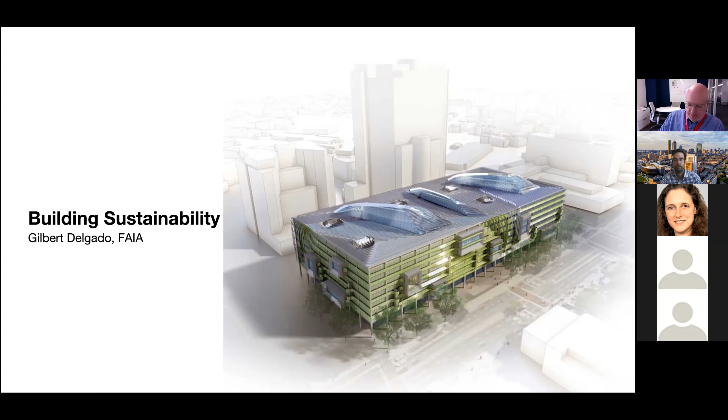A lot of this stuff is probably well understood by many, but let's look at it through the lens of what it means to the building environment.

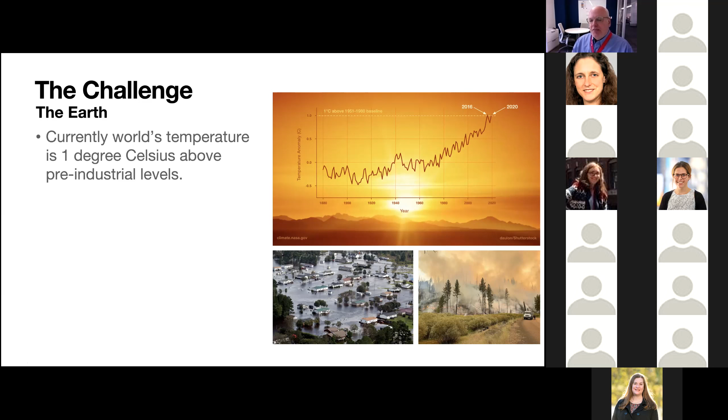Currently, the world's average temperature is about 1 degree higher than it was in pre-industrial levels, or roughly around the 1960s, which was the last baseline of zero. As you can see, it's been going incrementally up and down with the seasons, and then it finally reached about 1 degree back in 2016. So we're currently at that threshold.

At 2 degrees, if this were to continue and the temperature change increased 2 degrees above that baseline, we understand that coral reefs will start to disappear, and the Mediterranean will experience widespread desertification. So all the things we've come to love about the Mediterranean, much of it will be gone, and that is a serious concern to everyone on the planet. Then at 3 degrees, it's been said that 760 million people will be displaced due to sea level rise, and primarily some of the major metropolitan areas on coastlines are all at threat.

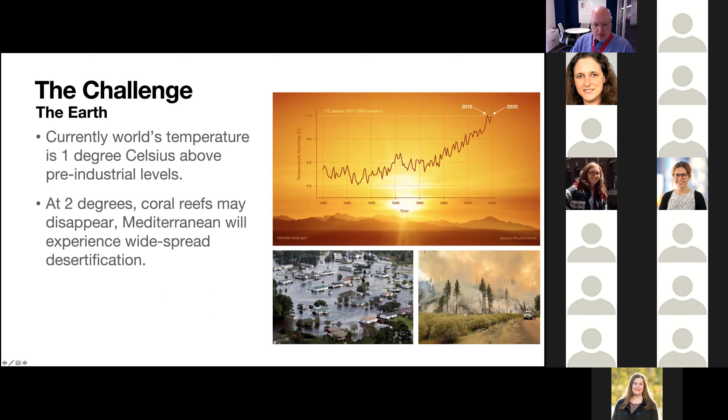So the challenge is an imminent threat in many ways. To maintain a 1.5 degrees Celsius rise, we can only emit 340 gigatons of CO2 to the atmosphere. We've quantified that volume, and therefore, to reach that target, we now have a definable goal, which is a 65% reduction by 2030.

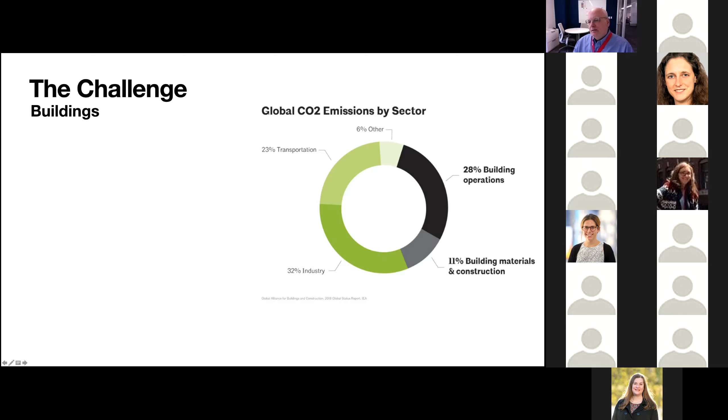Now this is where our responsibility comes into play. If you look at CO2 emissions on the planet by different enterprises, the building enterprise takes up roughly about 40%. About 28% of it is based on building operations — that's the carbon generated by people turning on the lights, heating and cooling their buildings, and operating their machinery. Another 11% is based on embodied energy in the buildings themselves, in terms of the energy required to actually build the building. Together they comprise about 40%; transportation is about 23%.

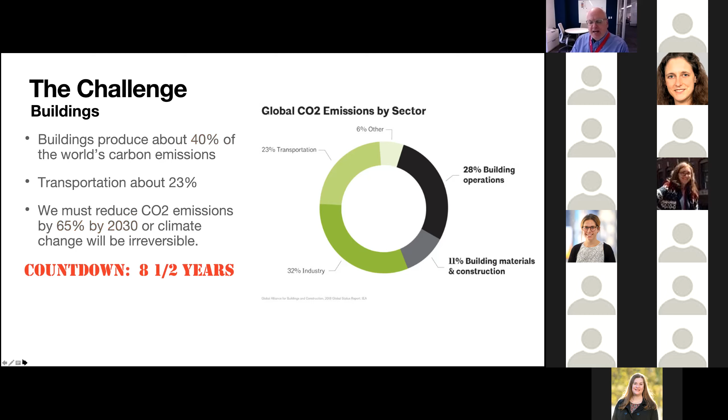And just to reiterate, we must reduce CO2 emissions by 65% by 2030, or the climate change will be irreversible. That leaves us 8.5 years to meet that target.

The other sobering reality is that the building stock of the planet will double in about 40 years. So we need to reduce our carbon greenhouse gas emissions by 65%, and at the same time, we're going to be increasing our building stock. In some ways, we see some of that on our very own campus. Even though we are challenged to reduce our carbon emissions, we are also increasing the size of the campus significantly, and this is mirrored on a global scale.

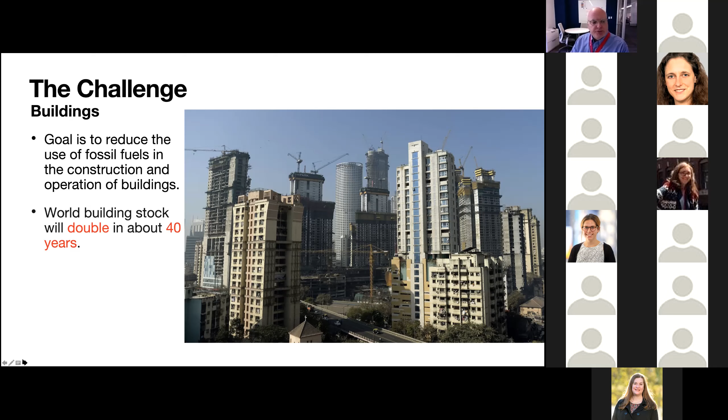Looking at how buildings more specifically use carbon, about 10 to 20% is the embodied carbon in the building, and 80 to 90% is the operation - specifically heating and cooling, lighting, electrical equipment and appliances - with the embodied energy being the blue pie slice.

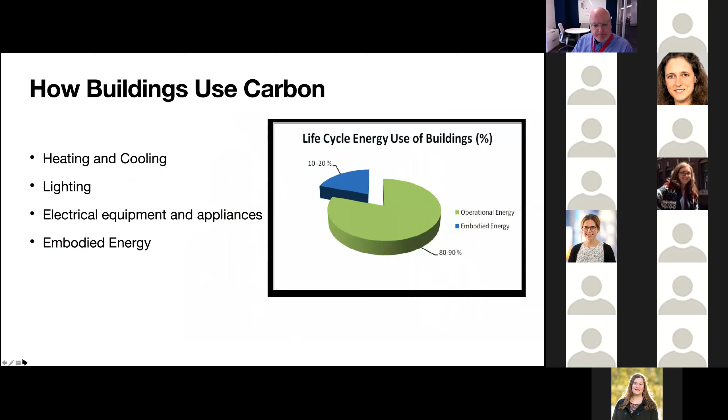Switching gears a little bit in terms of the overall challenge, Northeastern University has been committed to LEED, the worldwide established standard for reaching measurable and certifiable objectives in sustainability - not just energy and carbon, but also water and materials. The number of projects accomplished over the last several years meeting LEED certification targets is significant, many in the gold range, including many major projects.

I'm going to take a quick look at two of these projects specifically, because they are large and innovative in the way they address the sustainability question - and more specifically, because the most urgent thing on our horizon right now is the need to minimize greenhouse gas emissions.

The ISEC building is clad in a skin shaded by fins that result in a 78% reduction in the cooling peak load. For those of us who have studied how buildings use energy, keeping sunlight off the glass is one of the most effective ways to reduce the burden of heat gain. It's a costly approach, but very effective, and in this example they've used it to create a sculptural reading of the building that makes it quite beautiful.

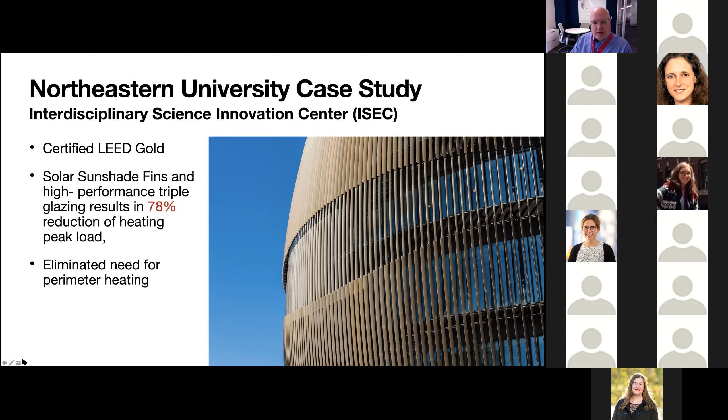Other ideas employed in ISEC resulted in the building using 50% less energy than the building code requirements. It does this through a variety of means - one being the utilization of high efficiency fume hoods.

Those of us working with laboratory buildings understand that these are the energy hogs of any campus. If you look at any university and the amount of BTUs per square foot across campus, the highest are always laboratory buildings, because of the amount of air they need to dispel - and that air is usually warmed, so it's energy that's warmed and then expelled very quickly. Having high efficiency fume hoods that either shut down when not in use, or have innovative ways to exhaust the air, are very effective.

Chilled beams are another way to reduce the amount of energy utilized by a building. Heat recovery is where heat generated through the building process is utilized again to heat the building. In the case of ISEC, there's a large atrium used as a mixing box, which takes some of the exhausted air out of the labs and uses it to ventilate the non-laboratory spaces. Again, the air has already been heated, so the energy to heat it has been eliminated or reduced.

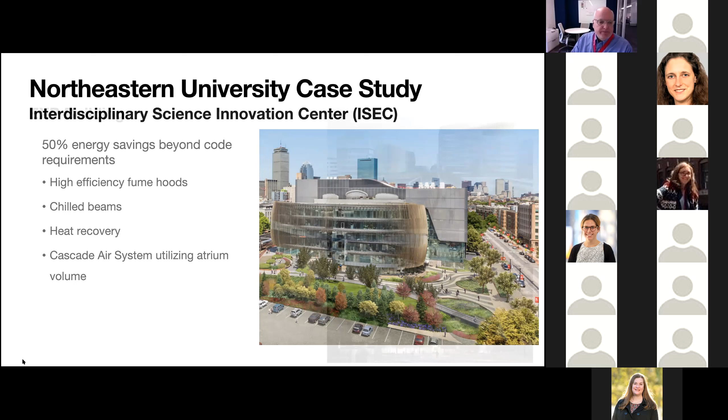The EXP building, currently under design, is being designed with LEED as its target. We know for sure we're going to get gold, and we're actually targeting LEED Platinum. Again, it employs a shaded building envelope, which also helps with heat gain in the summer and minimizes the need to cool the building.

Again, using reduced lab airflow and exhaust minimizes the burden on the mechanical system having to heat and cool air that's moved out of the building very quickly. Lab exhaust energy recovery means air that's already heated is being utilized to heat the building.

High efficiency chilled water plants and boilers all result in a building that will utilize significantly less energy than a baseline building of its type, which is one of the LEED targets. In the energy model, you develop a baseline building and compare the building you're designing against that baseline, and you have to reduce a significant amount below that target to actually get that LEED point.

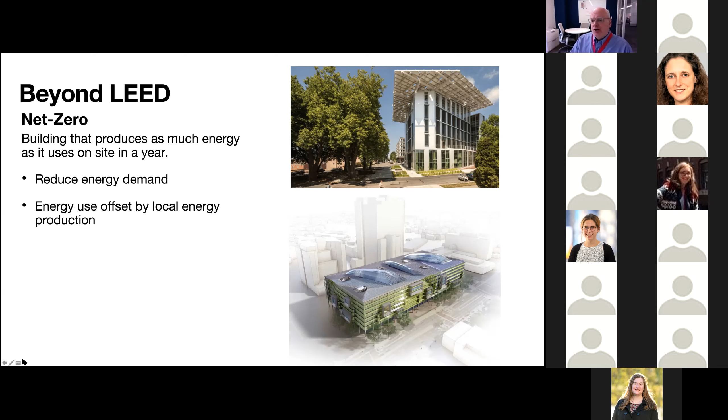That's why net zero is not a very good model for high-rise buildings, unless you have a photovoltaic farm or some other way to generate power remotely. But then you don't meet the target for on-site renewable. So it's usually reserved for mid-rise buildings. We're talking about buildings that at the end of the year did not consume any more energy than they produced—energy use equals energy production.

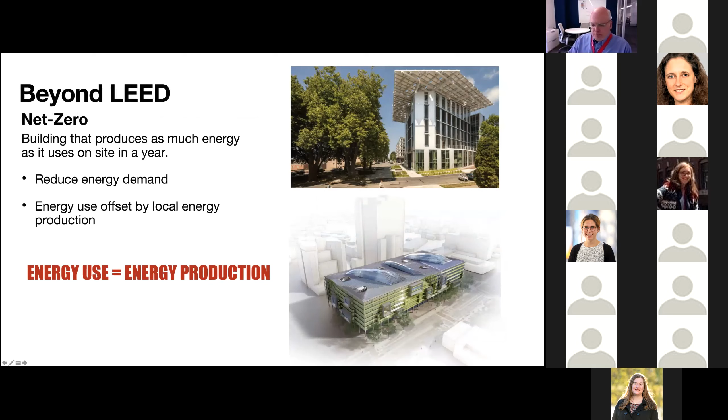I worked on a pretty ambitious building that actually was net zero—the Bloomberg Center at Cornell Tech. As you can see, architect Thom Mayne integrated the photovoltaics into a sculptural element of the building. But there were other things that had to happen to actually meet that sustainability target.

We installed 80 400-foot deep closed loop geothermal wells to heat and cool the building. That reduced the burden of the photovoltaics being the only thing providing renewable energy. We had one acre of solar panels, and some smart building link controls, because part of the equation is to minimize the demand side.

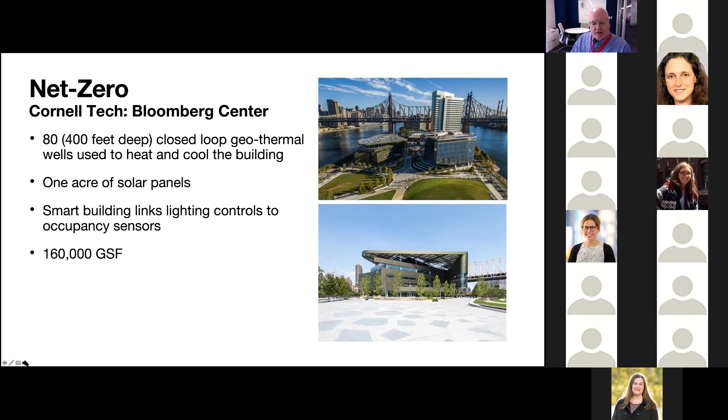Having a system that turns off the lights every time someone's not there is very important. The building is about 160,000 gross square feet. It had a 40,000 gallon rainwater harvesting tank—not specific to the net zero objective, but a sustainable approach to minimize the use of water.

So another example of a strategy I want to talk about is passive house. Passive house is a standard developed in Europe as a means to greatly reduce the amount of energy required to heat, cool, and operate buildings. I have a little picture of a thermos on the left, because that's kind of what it does—by hyper-insulating buildings and making sure that whatever heat or cooling is produced stays in the building.

This results in 80% less energy use than conventional construction. On the diagram below, you can see a thermal image. On the left is a traditional building, and you can see where the heat escapes out the windows. On the right is a passive house building, and you can see how much better insulated that building is.

Solar orientation is vitally important to capture the warmth of the sun in the winter and to control it in the summer. This is basic passive heating and cooling strategy, but one needs to understand that windows are notorious transmitters of heat and cold, so it needs to be very carefully modulated, with high insulation to a very high degree, high performance windows, and airtight enclosures.

One of the things that is part of the passive house testing process is to set up an in situ air infiltration test to be sure that the building is hermetic.

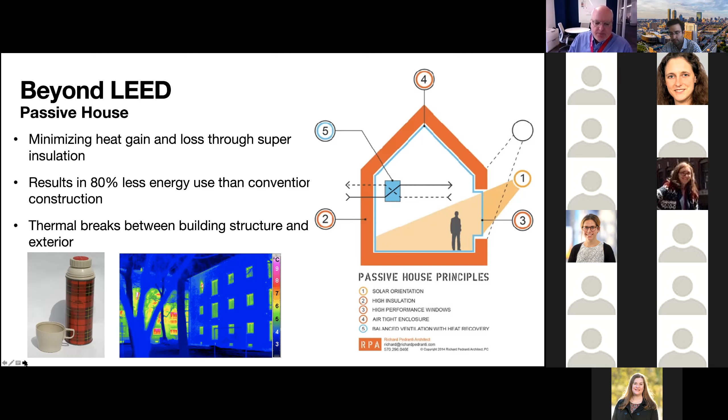So it's a very effective strategy, one that was also employed at Cornell Tech. This is the residential tower, 352 rental units. It's the tallest passive house building in the world, and it's LEED Platinum.

Now, the last bullet here is what I find really interesting, because one thing is to talk about these strategies, and then the question that probably comes to a lot of people's mind is: is this economically feasible? We were working with Hudson Related, which is a large developer in New York City, and we told them that we had this objective of Cornell Tech being kind of a flagship for sustainability in construction. They were a little bit skeptical at first.

So we went to Austria, where passive house is actually a maturing industry, and they were really impressed. What really impressed them was that using 80% less energy translates into reducing their operational costs. And if they reduce their operational costs, it results in greater profitability, especially since there were long-term investors in the building. There was an interesting article in the New York Business Journal saying that this building was a watershed in terms of demonstrating how aggressive sustainability measures can actually be wise business decisions.

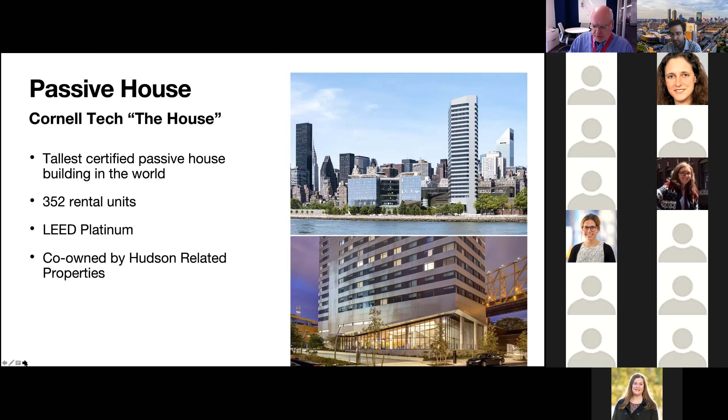At the University of Toronto, we also did a passive house building, this time 750 beds, and it also included dining, which was quite a challenge because of the high energy demands of kitchens. It also included student services.

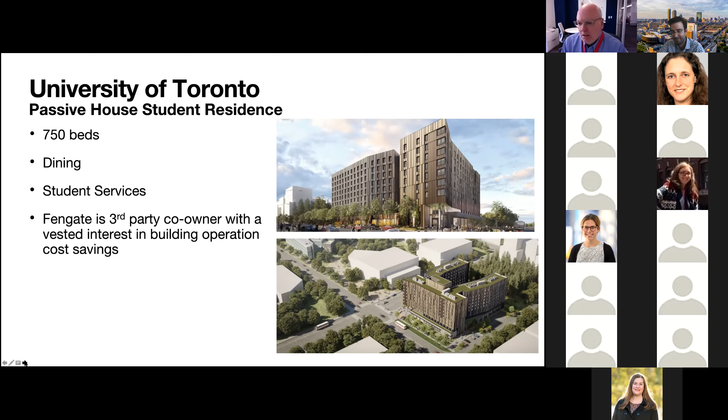And here again, we had a third-party co-owner. Fengate is an investment house in Canada, who was majority owner of the building for at least 30 years, for the time of the land lease. They determined that an 80% reduction in utilities would actually be a very wise business choice. They were in it with us all the way through, very enthusiastic participants of the design process and of the objective of providing a building that would be a signature building in that industry.

The third thing I want to talk a little bit about: we talked about how there's two parts of how buildings utilize carbon. One is in the operation, and net zero and passive house are primarily examples of how to reduce the operational footprint. Now I want to talk about how to lower the embodied energy footprint, and that is cross-laminated timber construction.

This is the use of wood to build high-rise buildings, which most building codes until very recently only went up to 5 or 6 stories in terms of allowable wood construction. We're talking about going much higher than that. Concrete and steel emit about 13% of the world's greenhouse gas emissions, so thinking differently about how to build taller is really worthwhile.

When I was living in Canada, this was of great interest to Canadians who have a pretty large surplus of timber, and this was the time of the steel tariffs of the last administration. This was something that the government itself was promoting, and it actually provided the University of Toronto with some subsidies to explore this as a technology.

It's a relatively new industry in North America. So it's not just the availability of the cross-laminated timber, but also the connections that connect the beam to column, enclosure system to structure. Those have to be steel, and those connections, at the time I was working on this project, were something of an infant industry.

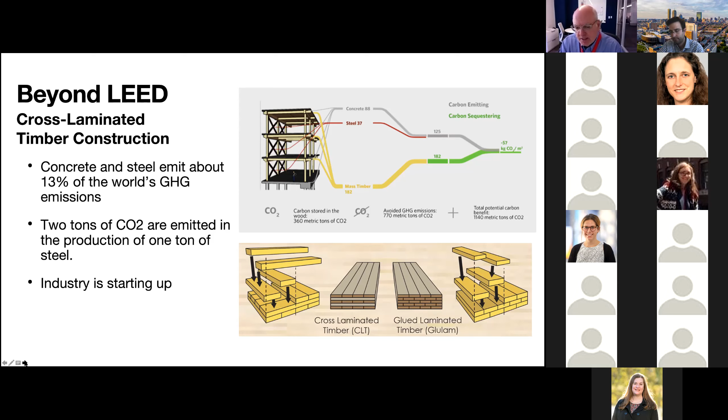The way it works is, most of us are familiar with glulam on the right. On the left is the cross-laminated timber approach, which gets its strength from crisscrossing wood, gaining structural strength that way.

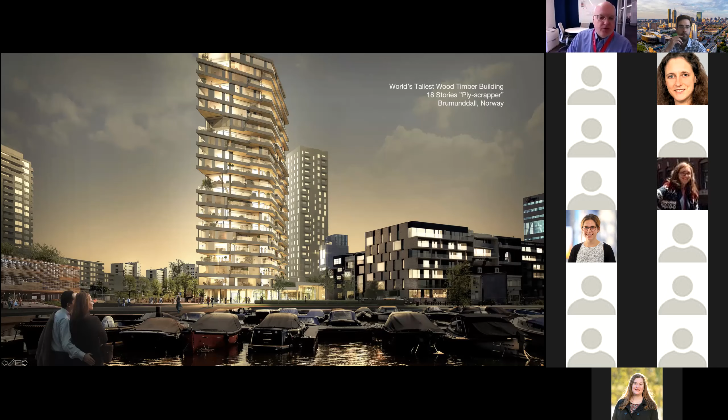The world's tallest timber building, they call it a plyscraper, is in Norway. It's 18 stories tall and just recently was completed. It's a residential building. Brock Commons at the University of British Columbia is an 18-story student residence, demonstrating that it's a viable option also for universities and university housing.

There are some other benefits aside from carbon emission avoidance in fabrication and production. It also benefits from prefabrication advantages. The wood planks arrive on site, and there's no need for concrete on a deck to cure. Once the deck is laid down, workmen can get on their knees and work on it immediately. So there's a construction speed and also quality assurance that happens when these things are manufactured in a shop as opposed to on site.

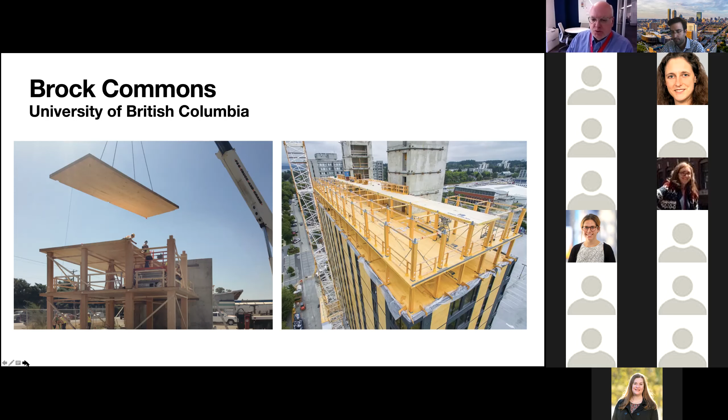Another interesting advantage of timber construction is that some fire codes haven't caught up yet. An interesting aspect is that most of us think, well, what about fire? Traditional building codes use gypboard to provide fireproofing for this type of construction. But if you take a blowtorch to a small piece of wood, it'll ignite—try doing that with a very large piece of wood. Cross-laminated timber has passed several fire tests. The outer part of the wood gets charred and protects the core of the structure, and it has roughly the same fire resistivity as structural steel, which actually melts when the temperature reaches a certain level.

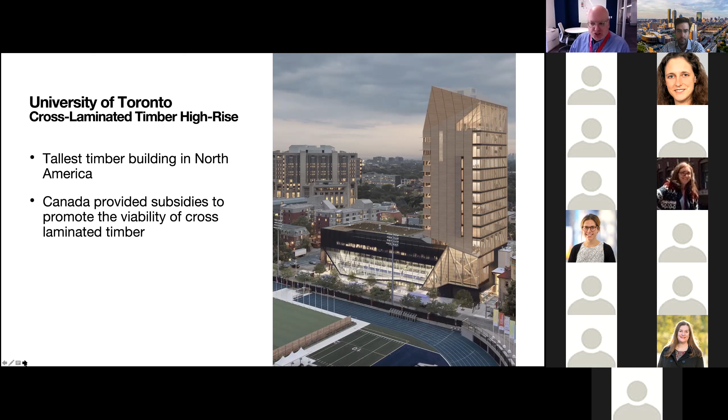A project I worked on in Toronto was, at the time, supposed to be the tallest building—I think the tallest in North America. I think it's under construction now. We benefited greatly because the Canadian government was very interested in promoting this industry, so we got a pretty significant subsidy for design and construction. You can see it's a very elegant building, an interesting case study.

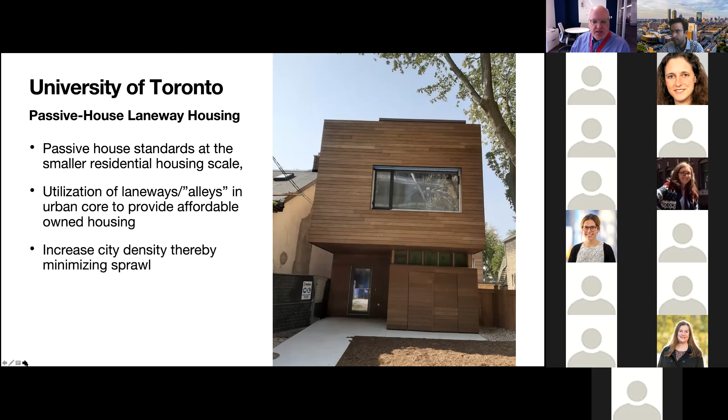We also worked at a smaller scale in Toronto. We had a strategy called Laneway Housing, which is building small houses in alleyways. These we also did utilizing passive house standards, or certified passive house, demonstrating that at two scales it can be a very realistic approach to building.

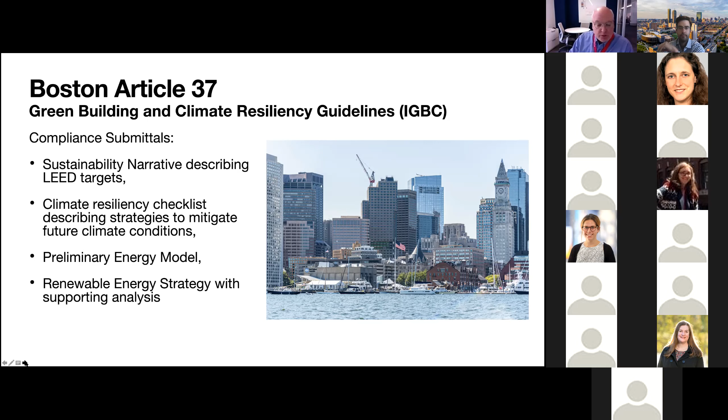Looking at what's coming down the pike for us—many of you might know of Article 37 that the city of Boston uses to define their sustainability objectives. There are compliance submittals that include sustainability narratives of LEED targets, a climate resiliency checklist, an energy model, and a renewable energy strategy with supporting analysis. They want to know why—have you examined photovoltaics, and why aren't you using photovoltaics? So there's a drive on a municipal level to push some of these requirements, and the check happens at the initial filing when you pull the design-build permit, and before you get your certificate of occupancy.

It's becoming more rigorous. So far we've had reporting requirements in terms of our energy utilization for individual buildings, but they're now moving towards establishing absolute limits for different types of buildings, and for a campus we'll have to demonstrate how we're complying with that. So all these strategies I mentioned might be instrumental in us achieving those targets, especially as we build new buildings.

And with that, I'll open it up for discussion.

Great, thank you very much, Gilbert. This is a great overview, great information about what we're doing here. There's a lot of questions I have already, but let's start off with—I think Tori had one in the chat, about the range of heights.

Her question was, is there a range of heights during which cross-laminated timber makes the most sense? And I would say most sense around here. Maybe apply it more specifically—like what could we see around here, what the building codes would allow. Well, believe it or not, there is an 80-story tower being planned for Chicago using cross-laminated timber.